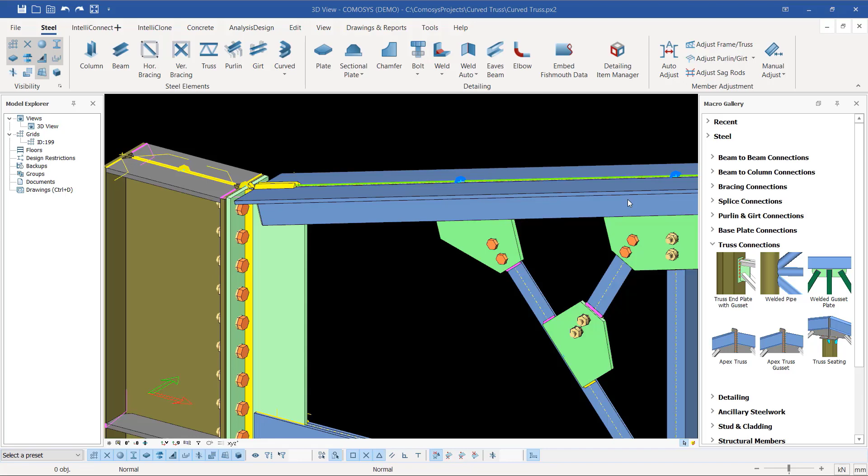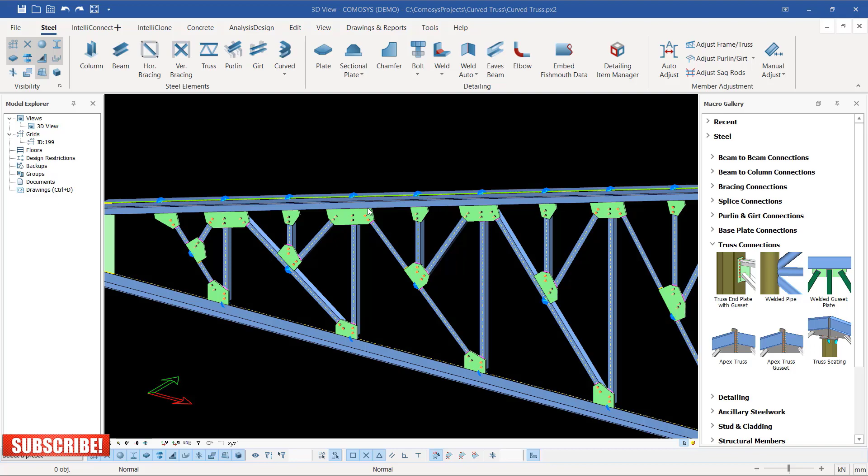Let me show you how we can do that, because this is a manually created truss, not created by macro. You have to assemble all the parts so it comes together. You organize your assembly how you want it fabricated in the workshop, lifted, or shipped to site for assembly and erection.

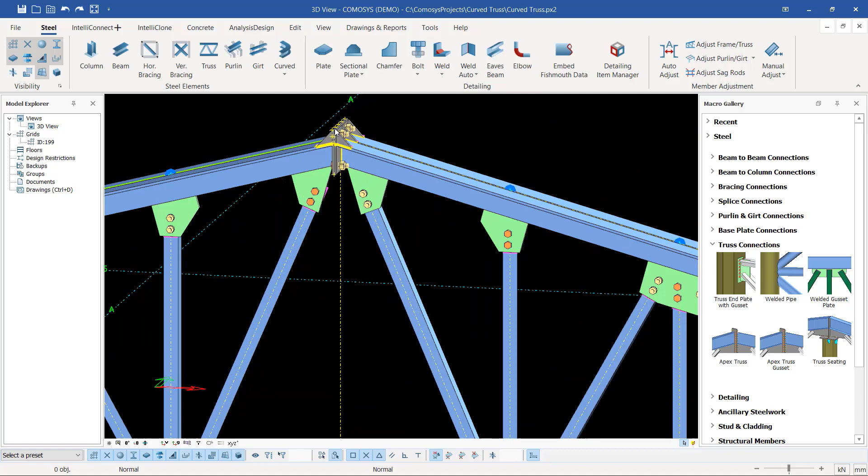So we have this truss split into two. One section will be carried to site, and this section will be carried to site. It will be lifted by crane and bolted. One side bolted on this, while holding this in position, we'll bring this and assemble it right at the center, at the apex here. Then bolt the splice at the bottom end here.

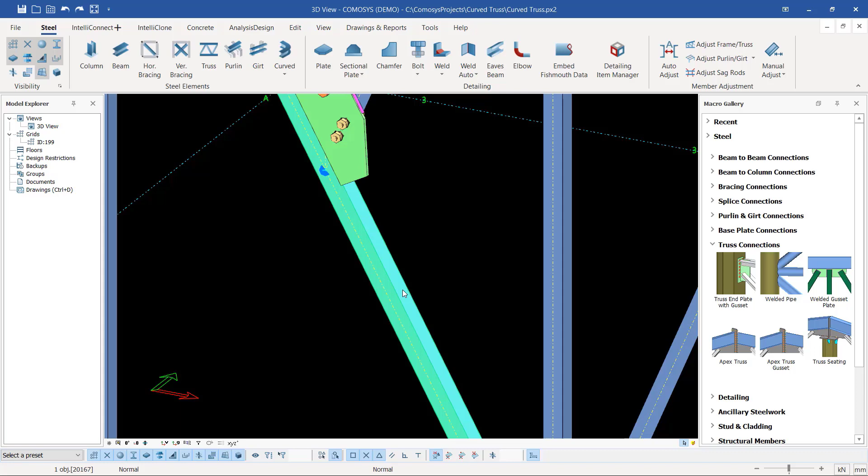Then do the rest. Now, as it is, our assembly is not fully assembled, so we want to put everything together as an assembly. If I mouse over here, select this member, the internal struts or members, right click and come to assembly, we'll find that these are already assembled because of this particular welding you can see here. So COMOSYS will read it as one assembly.

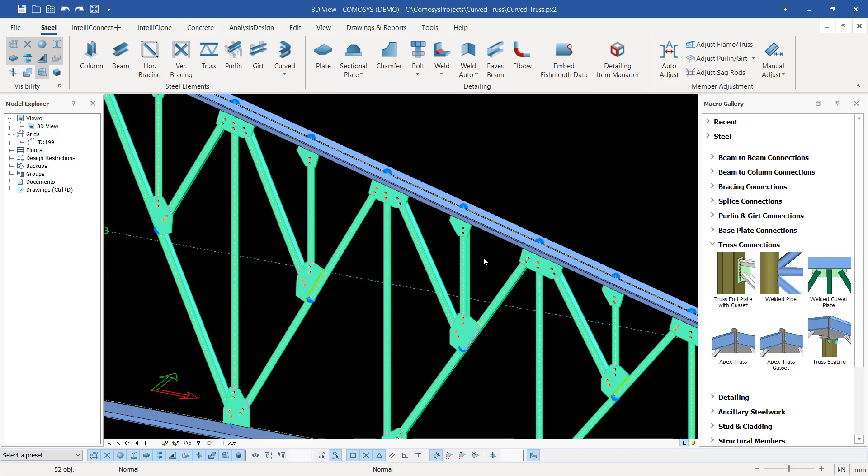If we go the same way here, click any member, right click and come to assembly, we'll see everything has been assembled. If I click assembly, you see the top and bottom chord have been left out. There's no way you'll be able to carry this as an assembly leaving both top and bottom chord. So we have to carry top and bottom chord as an assembly like this one, then do the erection on site.

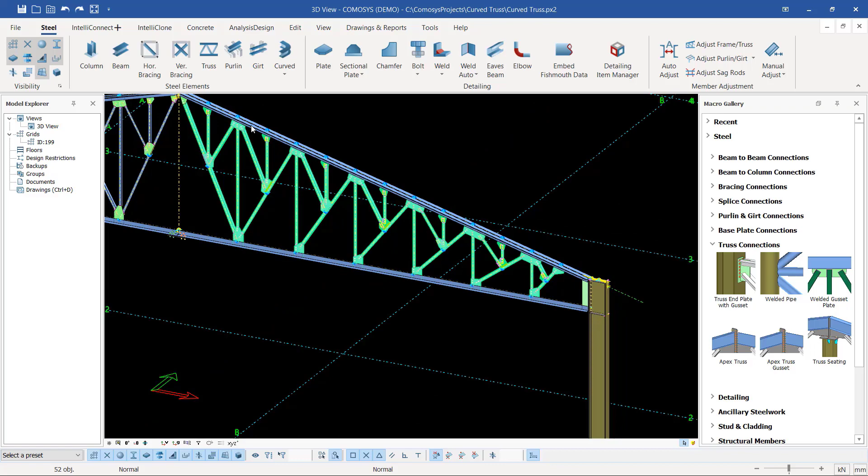Now let's add the top chord and bottom chord to the internal members as an assembly. We'll come to weld here, select weld, then select the edge of that particular top chord, then select any member here and add to that. We'll do the same, and prior to that, let's check whether everything has been added, or if it's fully assembled.

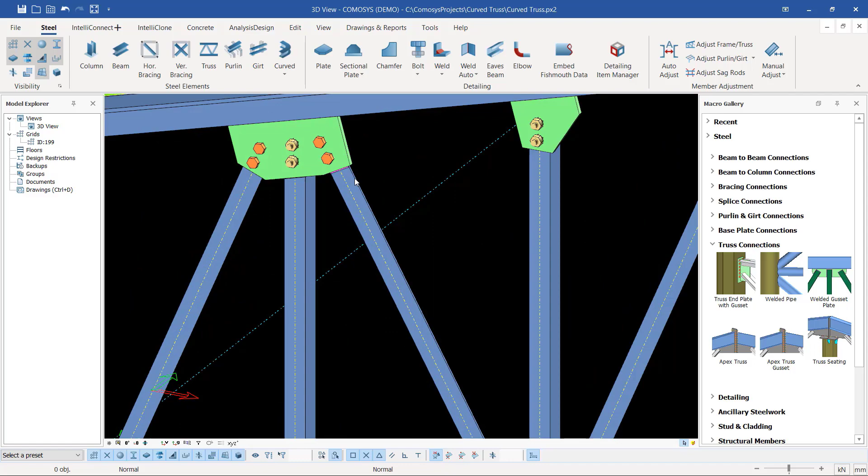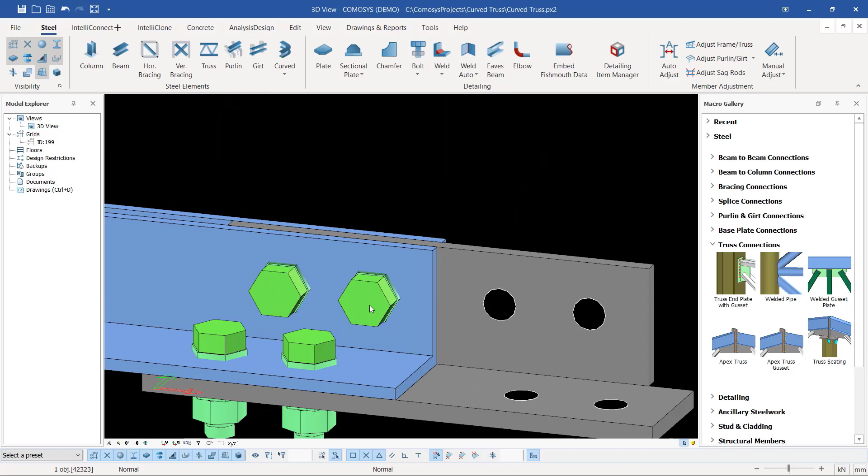Once welded or fabricated in the workshop, this will be carried on a truck that can accommodate the full length of this particular truss. You can see this will be carried, though these plates will be unbolted and will be bolted on site during erection.

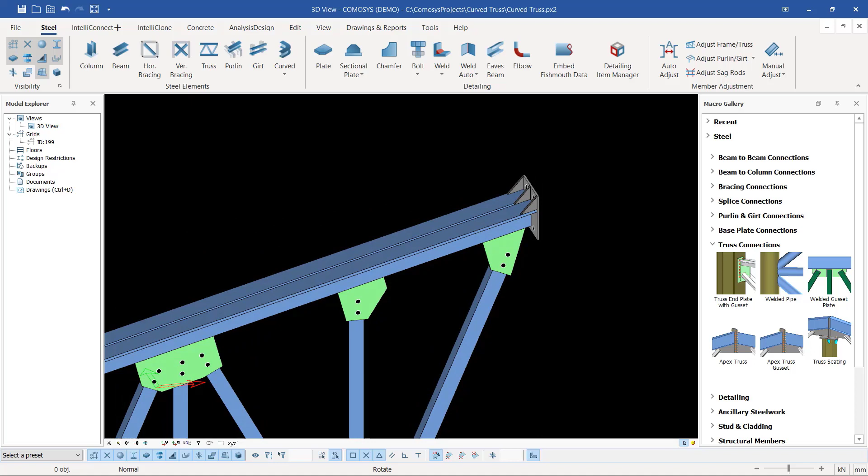So you can see that at the apex here we have that flange already done neatly, and we have that in place. The assembly has left out the bolts, or they've been just converted to holes instead of bolts. So you can see this is a full assembly, and you can just go ahead and create a drawing for this. Let me right click and come to show all.

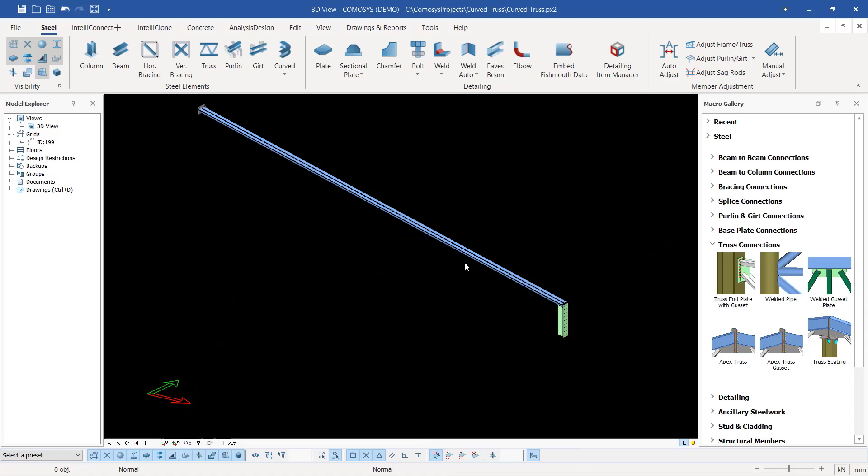If we come to the other section of this truss, you can see if I select this member, right click and select assembly, only this member has been selected as an assembly. I'll right click and come to special copy, then select or show only selected, and we'll see only this one. This is not the best assembly. You cannot take this to site as an assembly. So let's add that to our assembly.

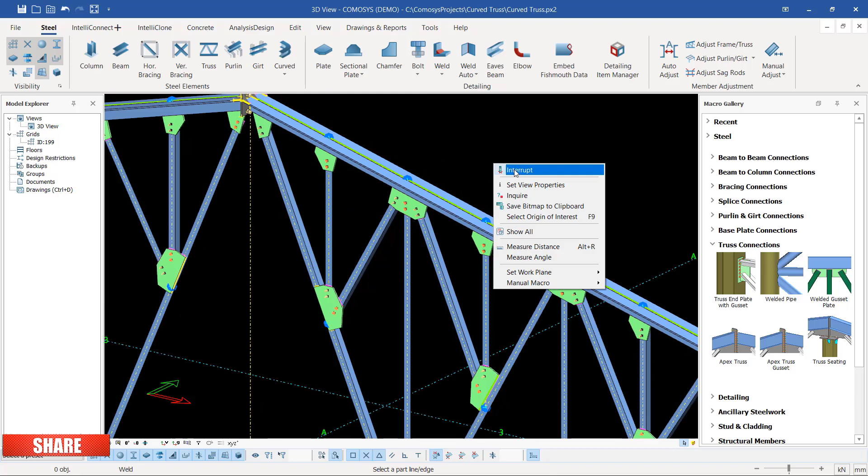I'll come to weld here and select weld, then snap at the edge right there and add it to our internal assembly here. If I right click and pick any member of this, right click and come to assembly, we'll see this member added to the top chord and added to the bottom end as an assembly, but the bottom chord is not added.

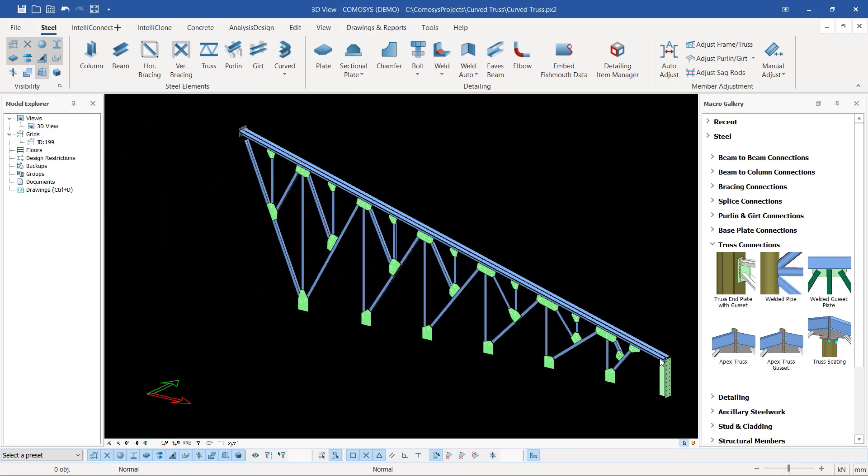Right click and come to show selected, so you can see only this has been added to assembly. So we want to add the bottom chord. I'll right click and come to show all, and come to weld again, pick on the weld, then add these to the assembly.

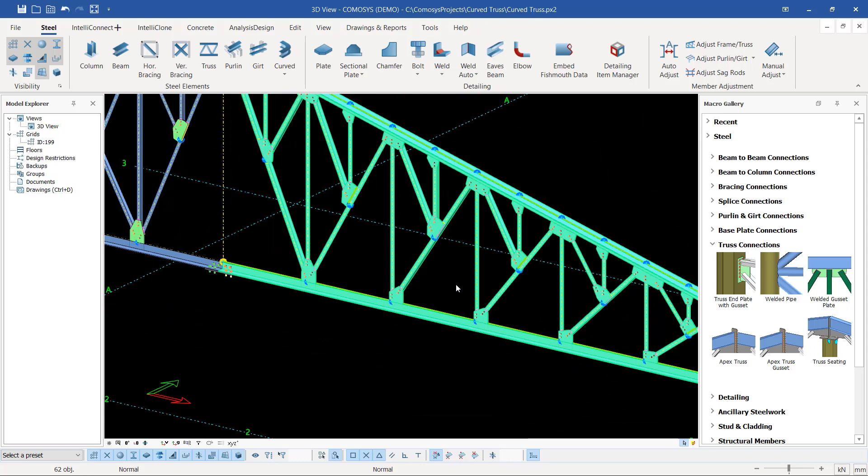Right click and try if this has been added. I'll come here and click assembly, and if I right click once again and show selected, you'll be able to see this has been added to assembly, though we are leaving a gusset plate here. We could add that gusset plate, or just leave it as is, since the other side has also included it inside the assembly. It's always good practice to add it and make it look much better.

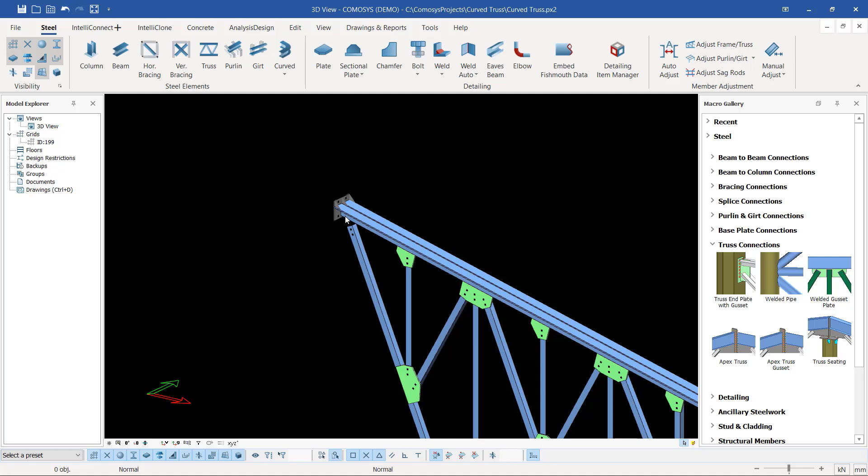Right click and show all. If I come here and weld this to that, the welding has been created. So let's try if our assembly is in place. It has been left out still.

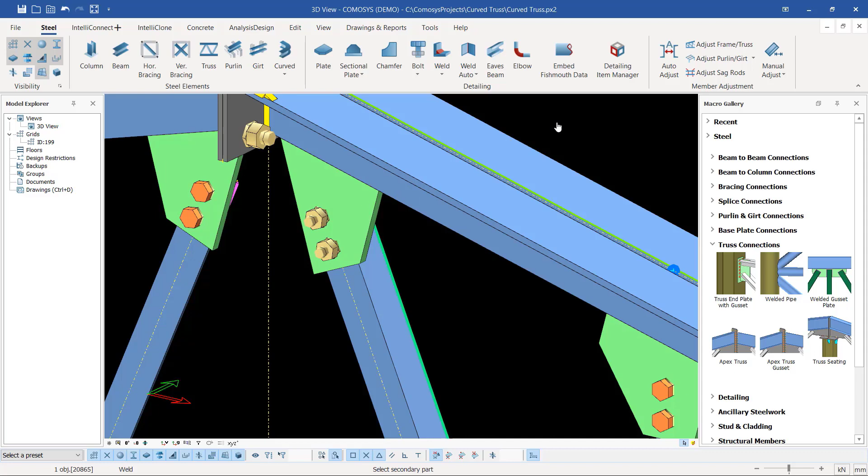So I'll come back to weld, and weld this member to this member. If I right click and try to check my assembly right there, I'll see it's still left out. So what next step do we need to take? What action do you need to take for this?

Let me first undo that so we remove the unnecessary weld. Let me select assembly, and everything has been included. So the part remaining is just this single gusset plate that hasn't been added. We want to add it.

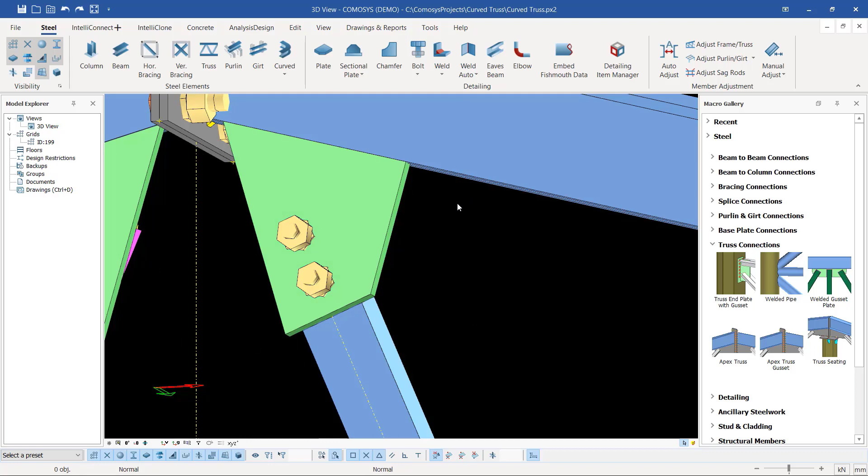To add it, let's try the automatic two-object welding. We select this member and add it to that member, then right click. If you select it, right click and come to assembly, you'll see it's still not adding up. So we try that.

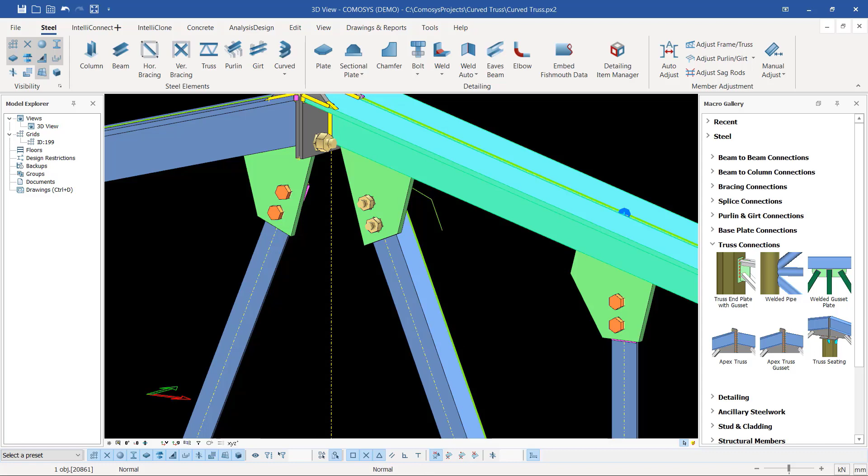We'll try this member here. First, turn it into position so I'll be able to add it well. Let me select on that member, select on this, and add that. Perfect. Now if I come here and show assembly, we'll have everything included.

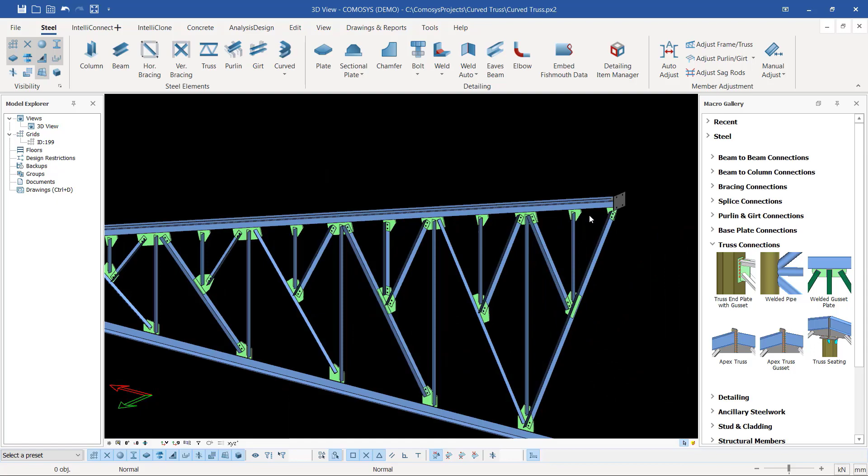If I click show selected, we'll see that has been included. This is how you can narrow down, add, or exclude assembly of your model. So if I right click and come to show all, I'll see that in place.

So let's add the base plate at the bottom end here. There's one thing I need to add - we need to add the eave. Under the eave here, you can see I have a point here. This point, we can just confirm the length.

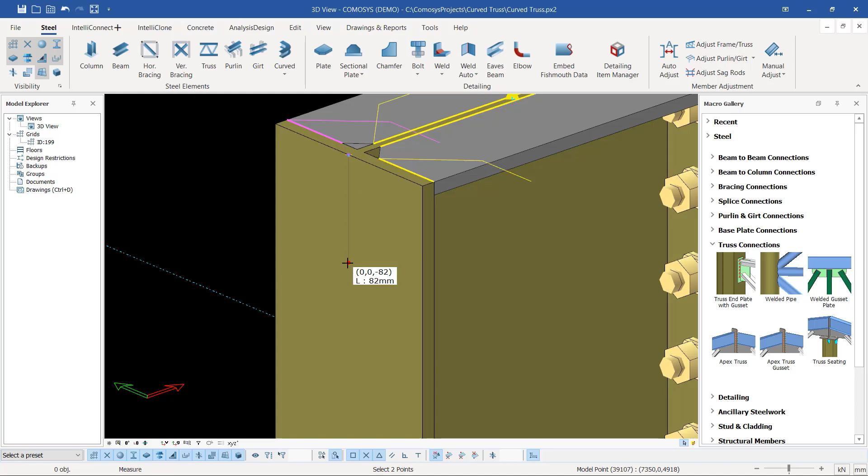If I come to check the distance, if I check on that distance, this is 82. I want to add this because it will be carrying the gutter, since the iron sheets will be sloping on that and draining water on the gutter here. Let me just define or create a member that will be suspending the gutter, where the gutter will be bolted.

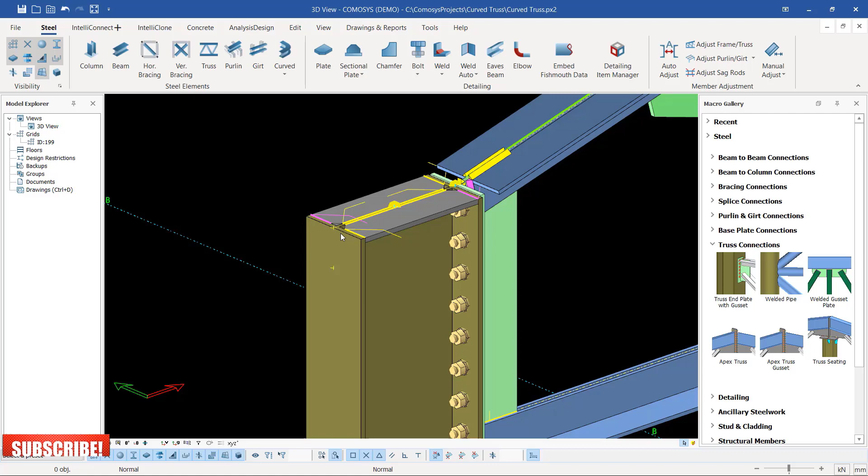I'll come to points here, come to edit to access the point, and snap on that point - though we have a point in place. So we'll just copy this point, right click and come to copy, click linear.

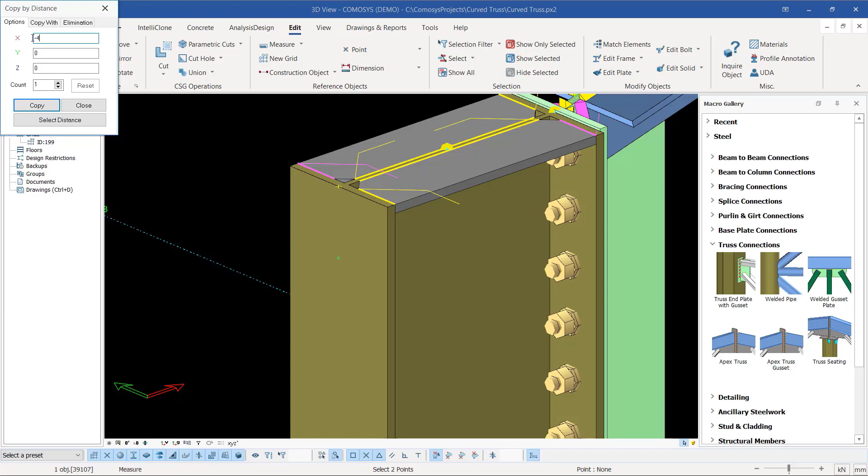Under linear, I'm going to offset this point by 400 in the direction of the x-axis, but with a negative prefix on the side of the x-axis. So I'll type in the negative sign, then type 400, and click copy - just one copy. If I zoom out, I'll be able to see this member, this point.

So I'll copy this point upward by 100 - 100 will be okay, I'll take it up by 100. I'll have to change everything to 0 except on the side of the z-axis. Since we're going up, we're moving in the positive direction, so we don't need to prefix it with a negative sign, because as it is, it's already positive.

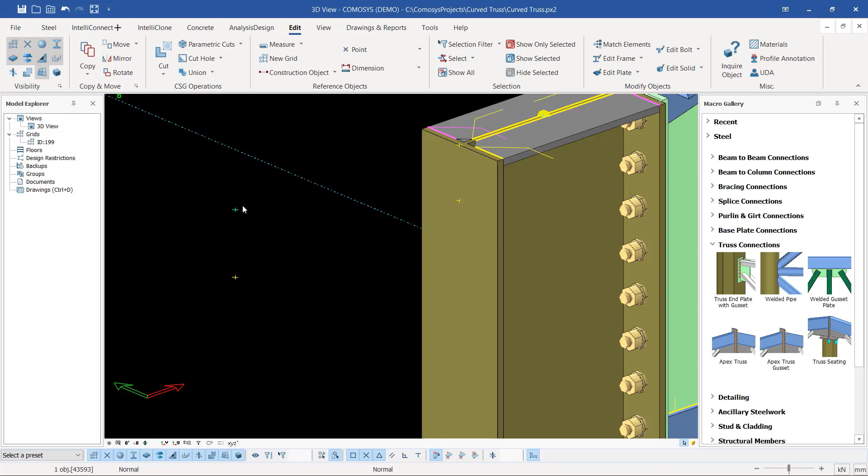So we click on that, click close - here, this is 100. We want to offset it on the x-axis once again. Select on that point and come to special copy, and we want to take it again on the x-axis direction by 50. 50 is okay, so we have to change the z-axis to 0.

So on the x-axis, we'll feed in here 50 millimeter and click. So we have to prefix this with the negative sign because we are moving in this direction, in the opposite direction of x. So if I click on that, we'll have our point in place.

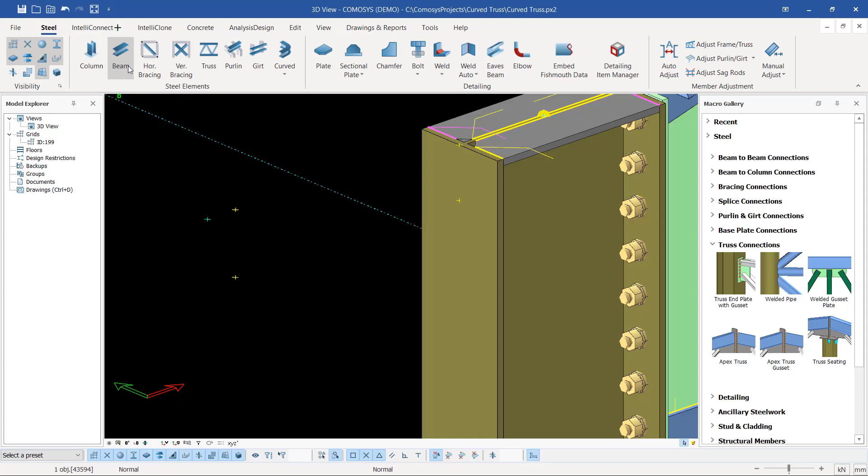So let me just place a member here. I'll pick on that member. I'll snap on that spot and move all the way to that spot. So we have our angle line in place, and we'll come here and place another member there. So let me just turn that around like that so that you see.

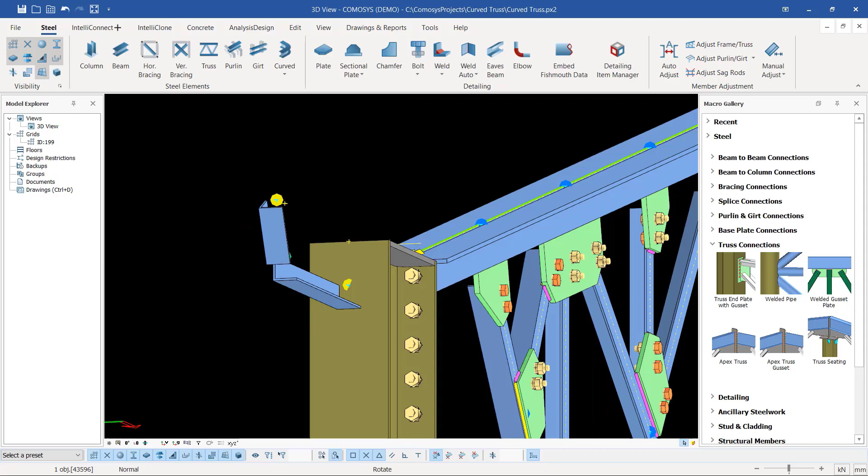So as it is, it's kind of tricky to place our gutter. There's no place it will be able to be bolted properly. So we have to rearrange the placement of this particular member. So select on that member, press Control Q so that we can turn that back to that far end. So select this one once again, select Q, and that will be able to connect with that.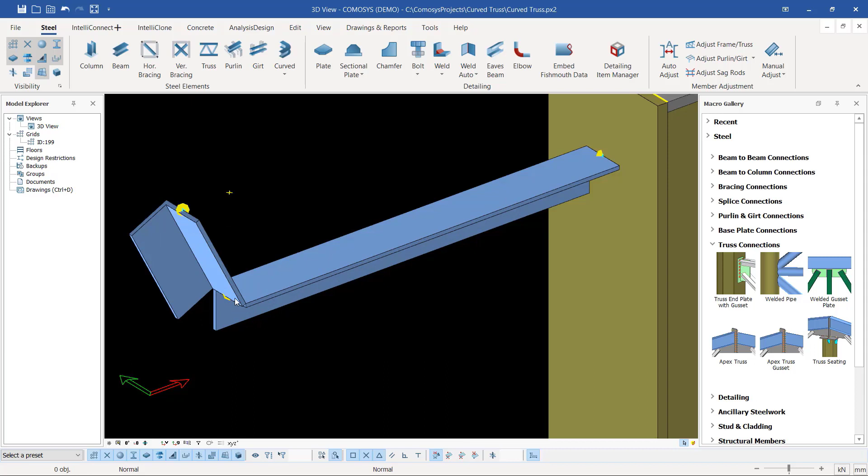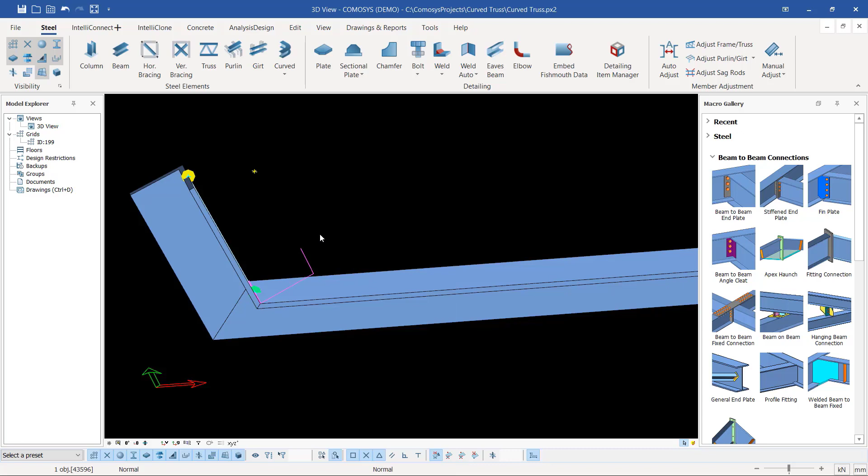So we have to fit these members because as it is now, there's no proper fitting here. So we'll have to fit this. So where to get the right tool for this? We'll come to beam to beam connection, and we pick on the fit connection. So if I pick on the fitting connection macro, select on that and select on this, I'll be able to create a connection right there, or I'll be able to fit the two members.

So let me rotate this and turn that, and I want to create an end plate connection between this member to that column. I'll minimize that and come to beam to column connection. So if I come there, I'll be able to pick on general end plate. So if I pick on general end plate, I'll be able to select this member and that member, right click to create a connection. There is no connection created.

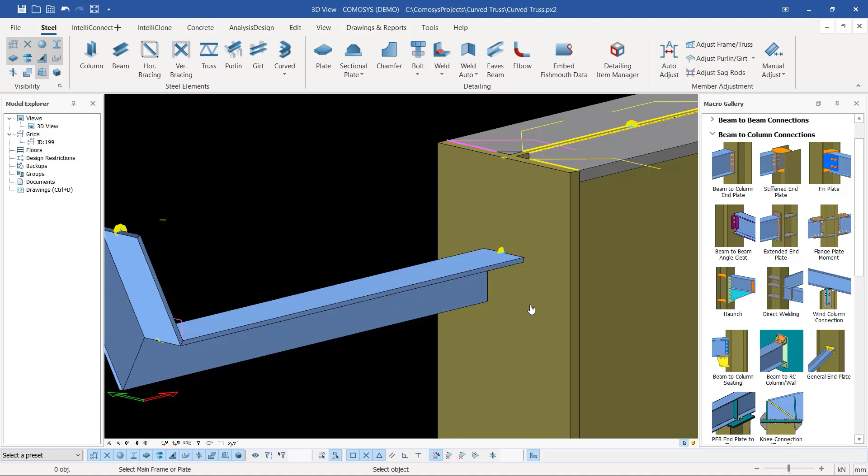So which tool can we apply? Let's first of all try that once again. Select main frame. This is the main frame, and this is the second member. So I'll right click, and I'll right click to come out of that command. So you can see we have this member in place.

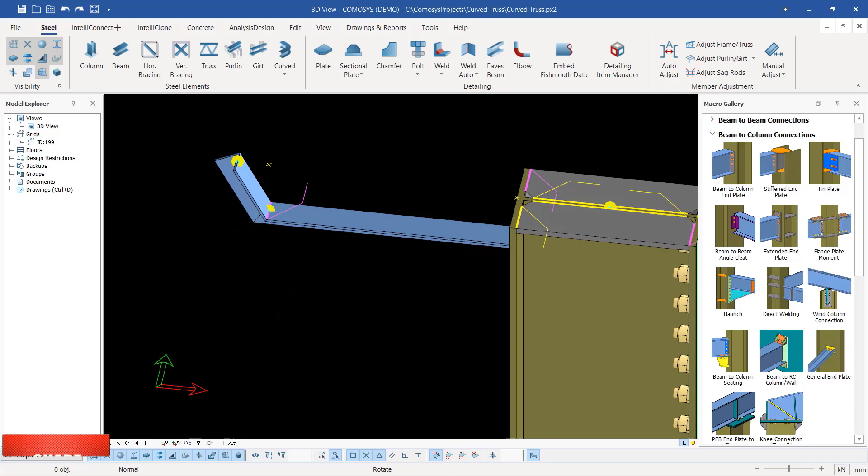And prior to that, we have first of all to identify the holes, identify the placement where we will locate the holes where the gutters will be bolted against this particular member. So we have to define the location of holes. So this will take us back to edit menu. Then we come to point. We select on dividing points.

So I'll use this existing point here and move all the way to this far point here to get the midpoint between these two. So in between these 2 points, I want to get the midpoint here. I'll come back to dividing points and snap on that spot and move all the way to that spot so that I get this midpoint. I'll come back here and snap on that spot to get that midpoint.

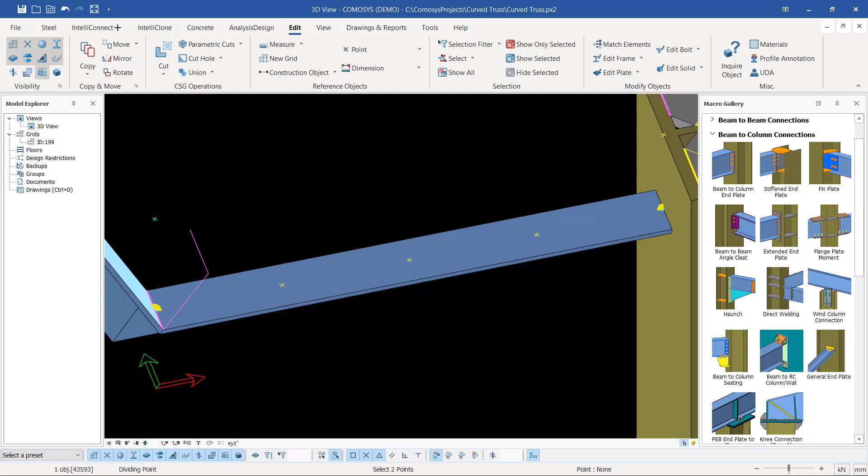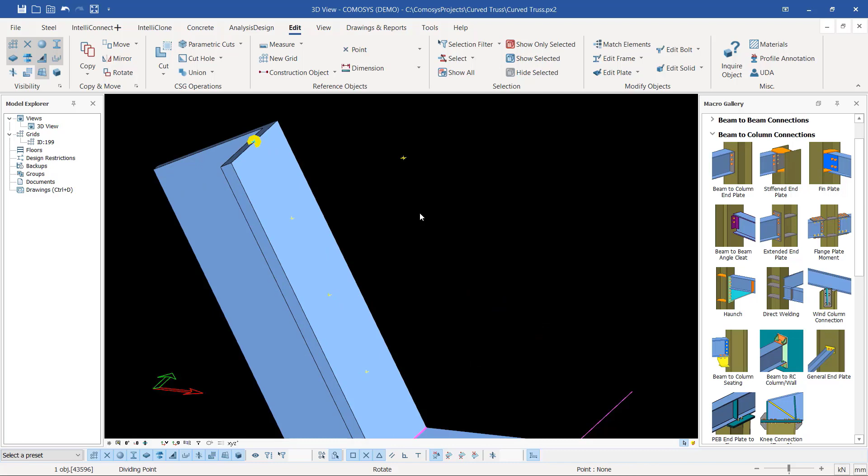I'll do the same thing here on the inclined member here. I'll come to dividing points and I'll snap on that spot and come all the way to that spot and snap. So let me create another point there and create another point here. Perfect. So you can see that. So once we have that in place, we can go ahead and create a connection here.

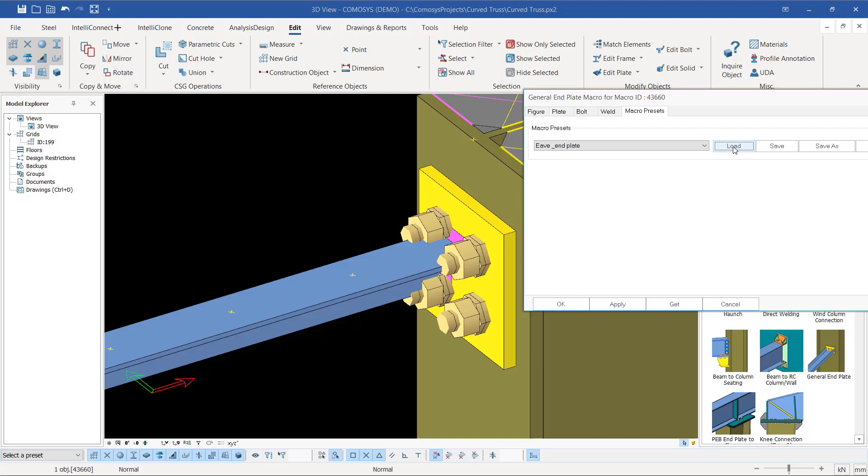So once we have a connection in place, just select any member, any part of that connection, double tap letter M on your keyboard and enter. So this will take us to our macro preset here where I'll just load in the type of connection I need to apply there. I'll click load to load my setting and click apply.

And if I come to OK here, select that point, your point of interest, and press your right button and hold and move your cursor like that. So we have that point, that part has been created. Now we want to create the holes here.

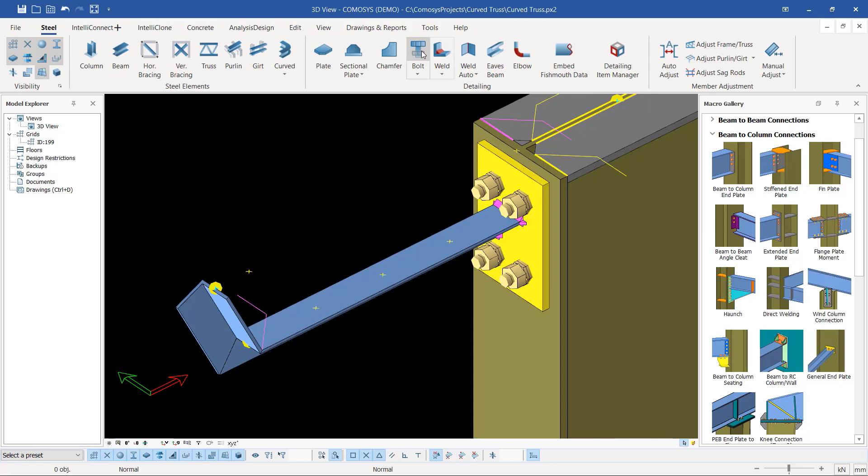I'll come to bolts under steel, then pick on the bolt. So I'll select the part I want to create the bolt on, then right click. Then I'll snap on that spot and snap on this spot here, on the points I had created. So you can see these bolts are way off the target or the defined points or the defined distances.

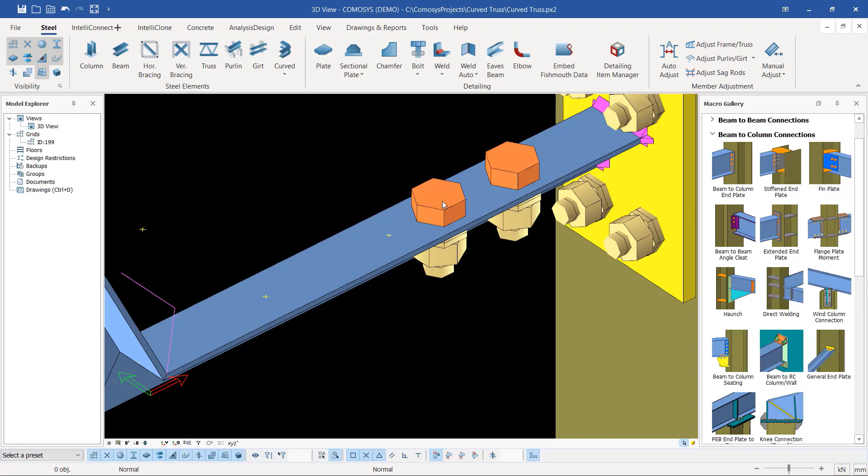So to check the bolt location, I'll select the bolt, right click and click hide selected. So I want to check this distance from here to here. What's the distance? I'll right click to interrupt, then right click once again, interrupt, then right click and come to measure. Then I'll snap on this spot and this spot. This is 100 and this is 200. So this is the 100 center to center of that bolt.

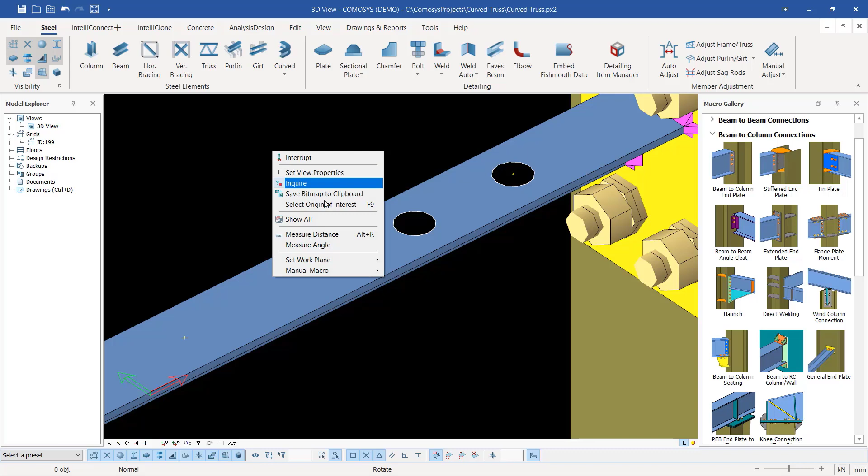Now I'll right click and come to show all, then double click on this bolt, then come to positions here. Under positions as it is now, from this center to this center is 60. And by default, we have 2 bolts in place. So we'll get rid of this 0. Now we want two bolts, 2 bolts at 100. So if you click OK, we'll have 2 bolts, but only 2 bolts here at 100 millimeter.

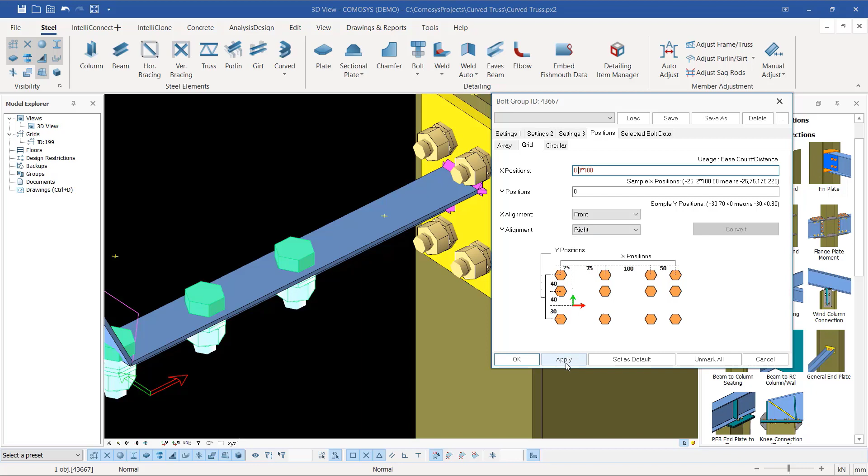So we go back and add another bolt here. Just add 1 to make it 3, and click OK. So we'll see another bolt added. So let's add 0 there and click apply. So we have a bolt here and we have an extra. So we have to get rid of another one there and click OK. So we have our 3 bolts in place.

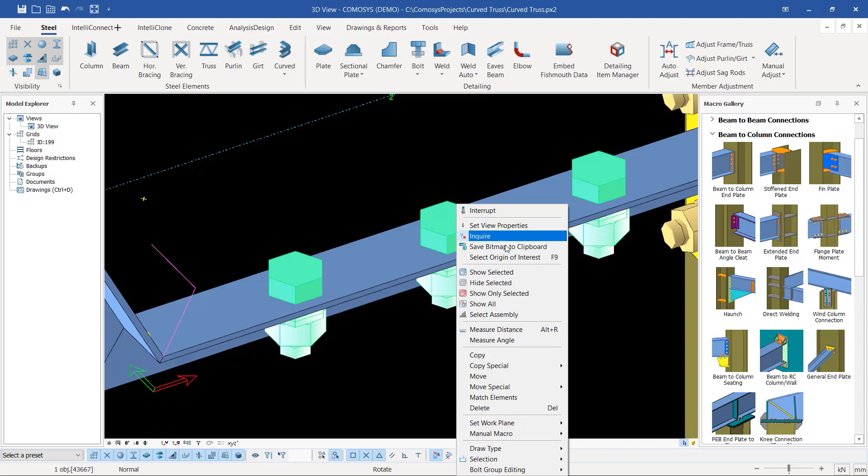So I'll turn that round. And to confirm whether it's 100 center to center, just hide this bolt first and check that. You can see it's exactly on the required location. Then right click and come to show all. Then we want to add another bolt here and another bolt here.

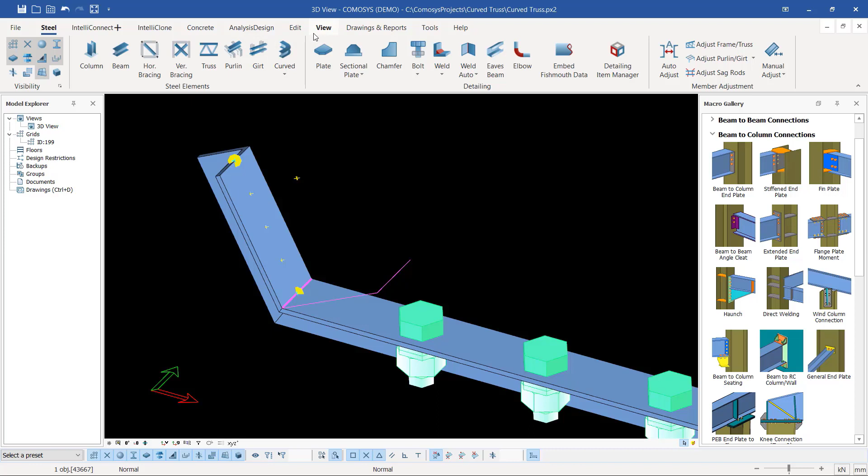And the way this member has been placed, it is on an inclined plane. So we have to orientate our work plane or axis to take the slope of that particular member. Let's first of all try it and see what's going to happen. I'll come to bolt, select this member, right click and snap on that spot and this spot, and you'll see the bolt is following the XYZ plane as it is here. It is on the global position. So I'll click on that and delete.

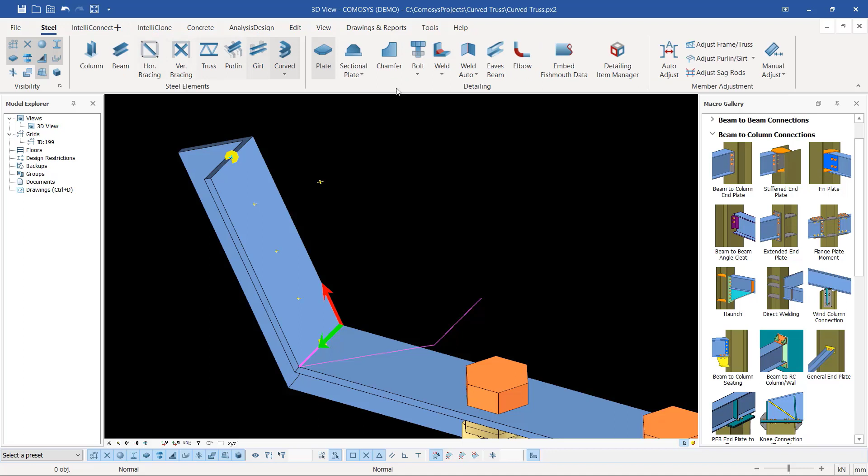So I want to take this axis and orientate it into the slope like this member. So I'll come to view, click on this drop down arrow and select to surface. I'll select the surface of that member. You can see our plane has taken the slope of this particular member. So I'll come to steel, pick the bolt, select the member I want to place a bolt on, right click and snap to that spot and this spot. So we have the bolts in place.

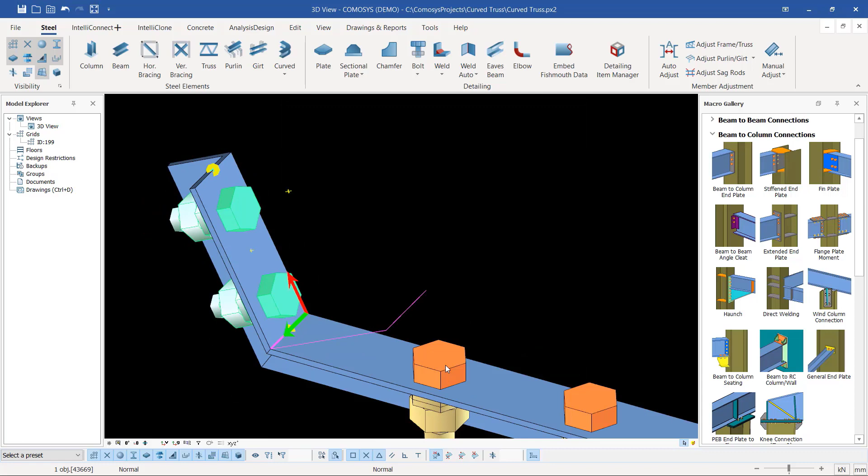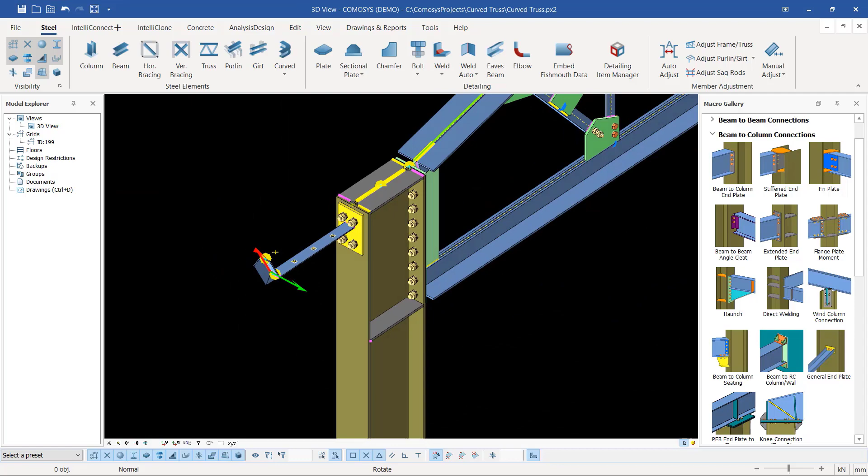If I double click on that bolt, I can change this to 16 millimeter or M16 and click OK. Then also double click here and change this to M16 and click apply. We want to show only holes, not bolt type. So just select hole, click OK, then double click on that and pick hole because we only want to see holes there. So this is how it looks.

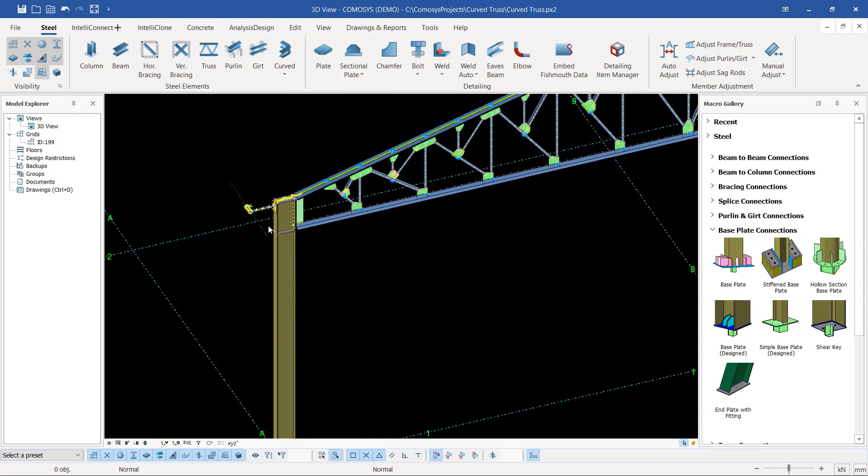And now we want to place the base plate. Let me just minimize this and come to base plate, pick the base plate, select the column, and we have a base plate in place. Now I want to copy this on the other end. I'll select this member, press Ctrl and select everything here. Right click and come to special copy.

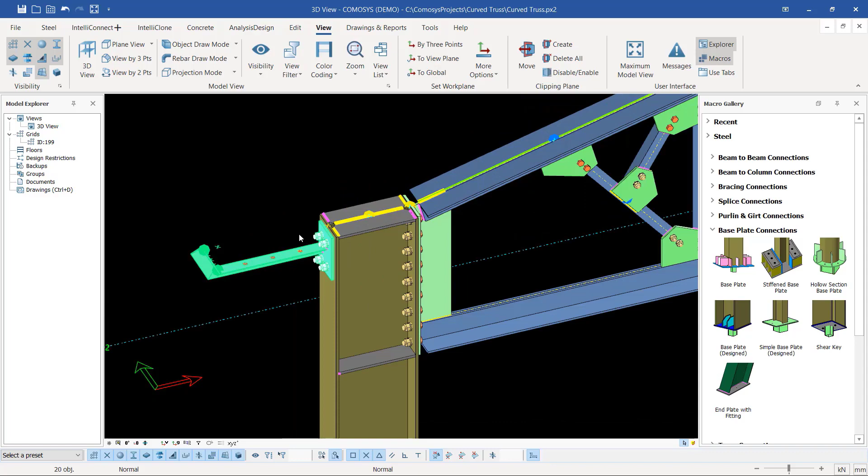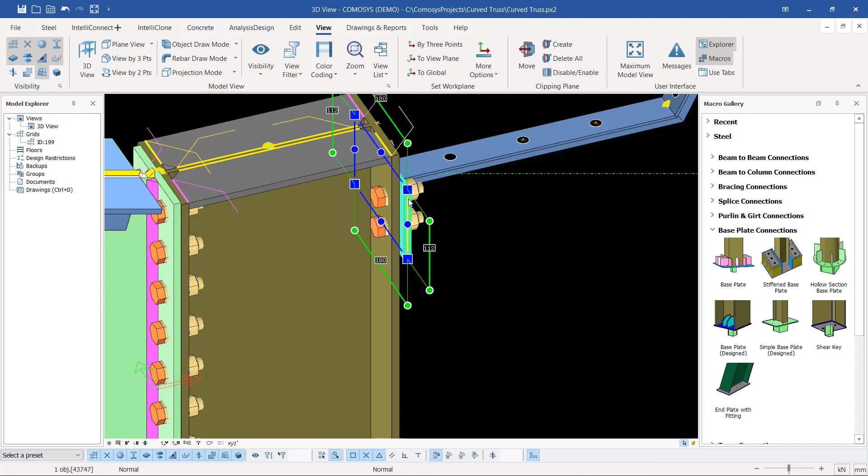And since our XYZ plane is not in the global position, I'll come to view and take it to global position. Then, having selected all these members, I want to mirror them in the opposite direction. So I'll right click, come to special copy and pick mirror. Under mirror, our mirror line is in the right location, so I'll come to options and click apply. Then I'll click close and come to this far end to check whether we have this in place.

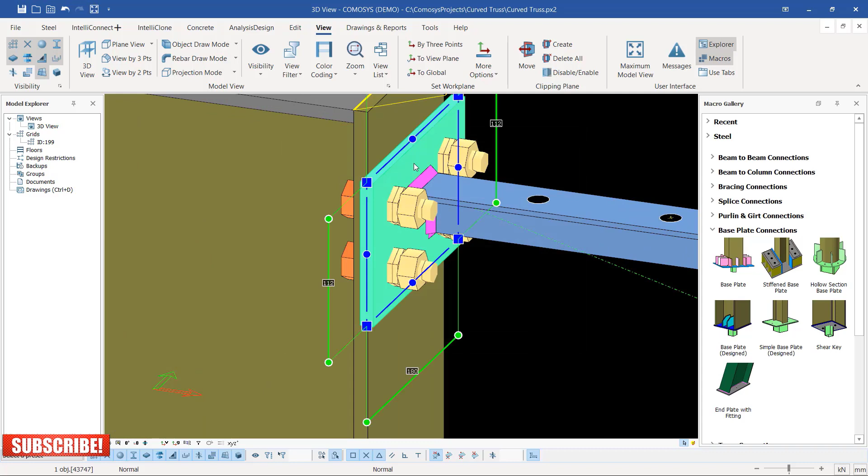Not the best position, so what we are going to do, we are going to recheck that and make it better. So I'm going to double click on this. I'm going to select any part of that member, double tap letter M and enter. Then I'll come to presets here and click end plate, IF end plate connection, then load, then click apply.

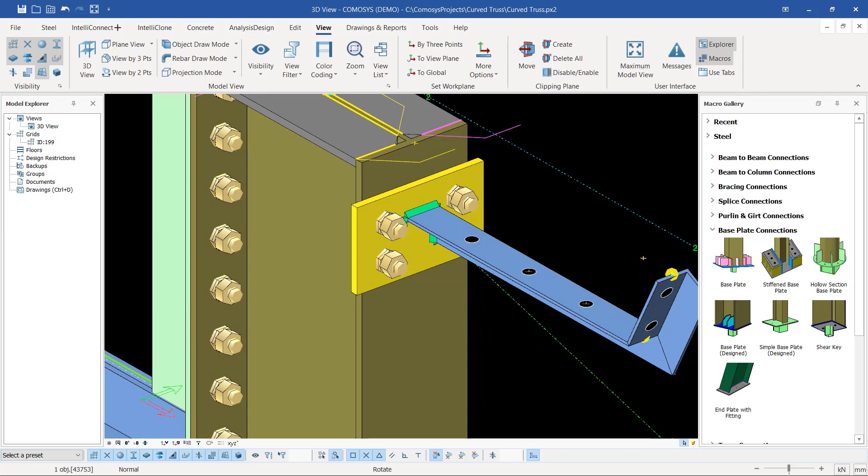Still not responding, and what I'm going to do now, I'm going to just select this member and delete, because I don't want to jump back and forth. I want to go straight and create it. Let me just undo that, undo that, undo that. So let me delete that. So I'll come back here on the beam to column. Then I want to invoke that command, select that member and select this member. So we have that in place.

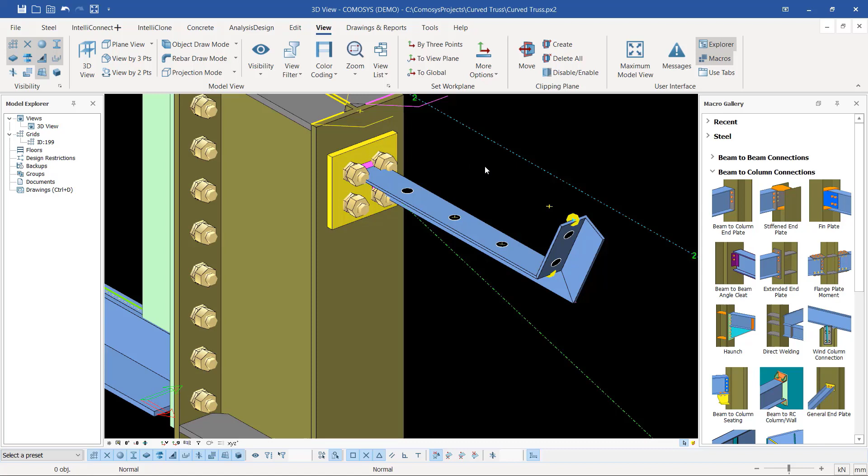So I'll select that member, double tap on letter M and enter. Then I'll come to my preset here, pick on IF end plate and click load and click apply. It's still not taking the best orientation. So what I'm going to do, I'm going to rotate this. I'm going to change these measurements.

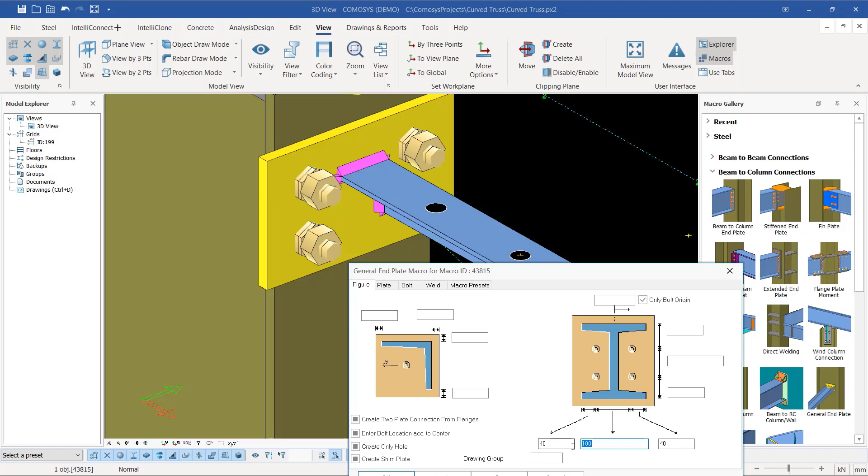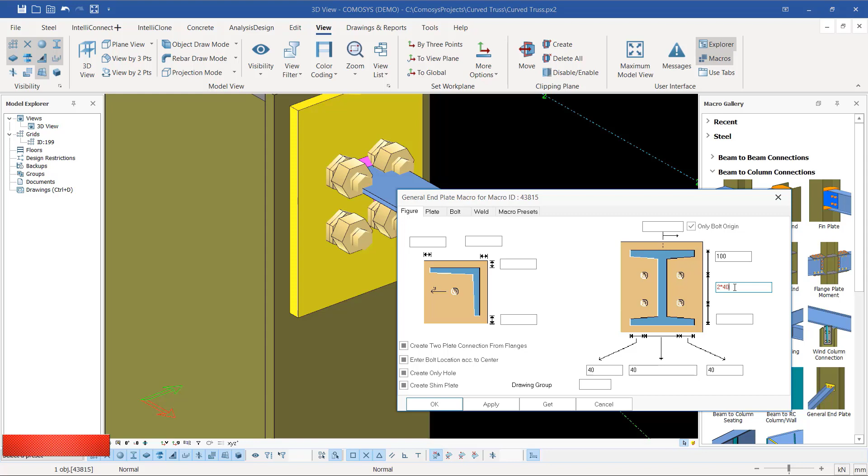I'm going to change this to 40. Let me just turn that. Apply. Change that to 100. Change this to 2 by 40. Apply that. Let me just undo that and undo that. So I'll undo this and then change.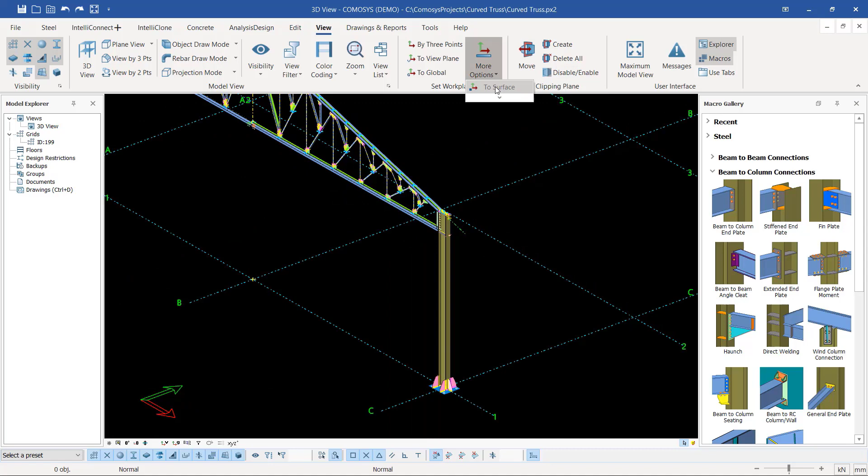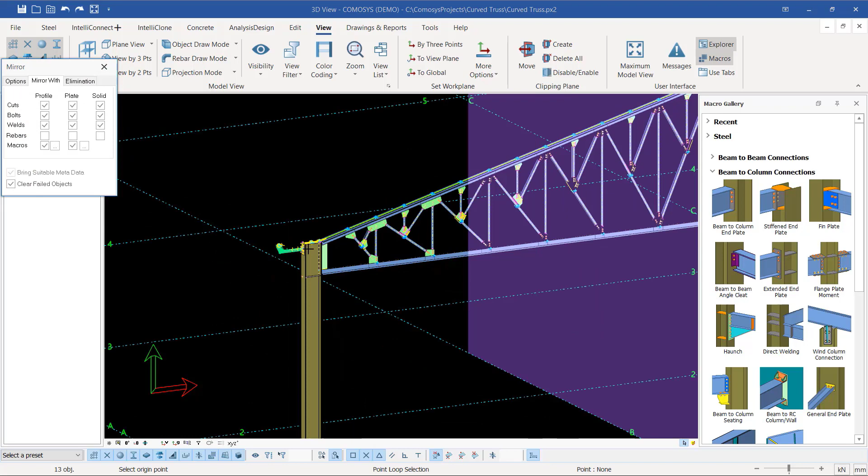Let me just change my XYZ plane. I'll come to more options here and select on that member. Then let me just place my XYZ plane on that spot. Then come here and select everything here. Press Control and rotate that. Then right click and come to Spatial Copy. Click on Mirror. Then click Run. So if I come here and check, it's still not responding. I'll turn that. I'll close my mirror there.

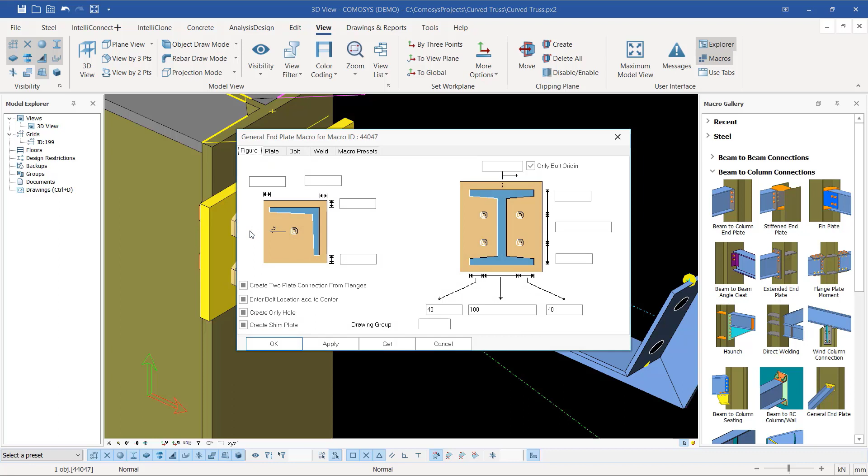So the next thing I'm going to do, I'm going to select this member, then double tap letter M to see how we can work our way on this. So in here we have 100. We change that, remove that. We click apply. Remove that. Take that to 40. Take that to 100. Take this to 100, which is wrong. Change that. We need two bolts there. Just a bolt right there. By 85 or 40.

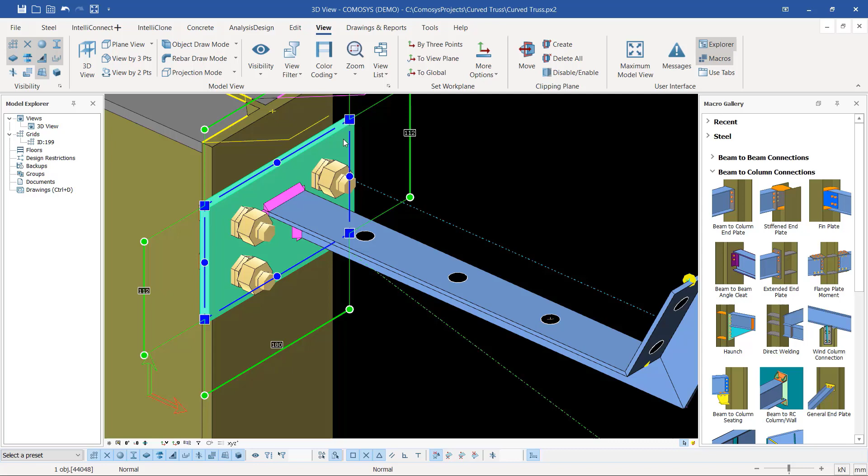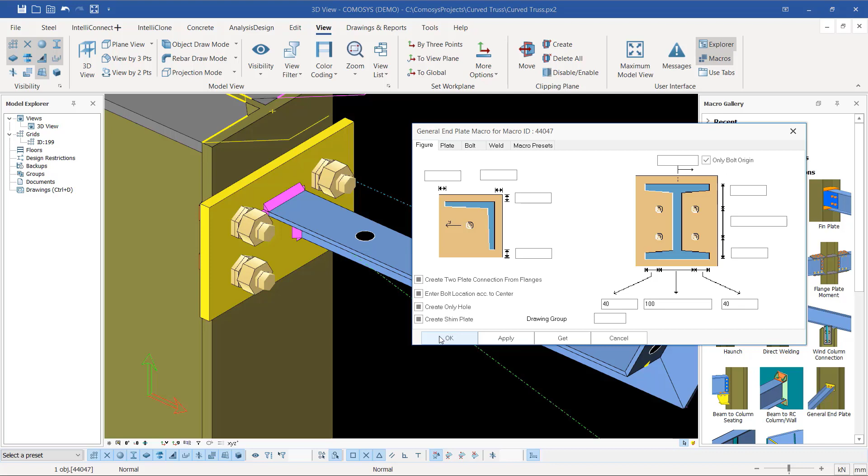Let me just apply my default settings here, load and apply. Let me select on that, double tap letter M so that we come here. Plate, weld. Okay, due to time, let me just show you how you can work your way out of that. Let me just click OK.

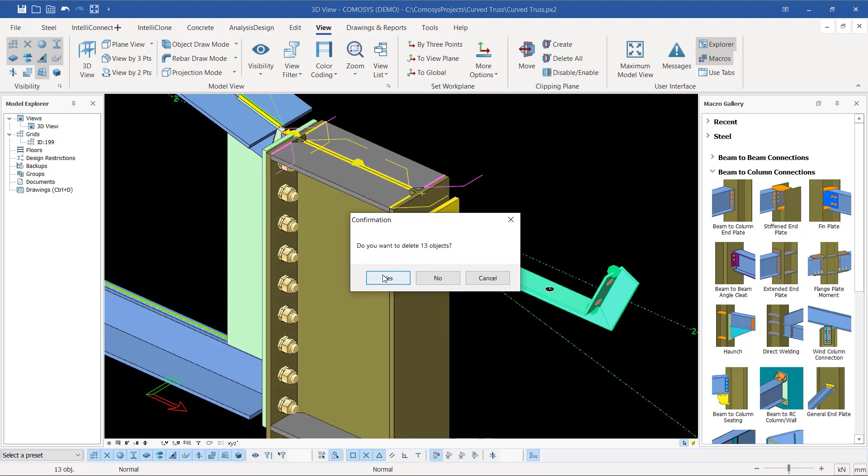So assume this is correct now, and first of all, before we populate this along the axis, let me just take that to global plane. Let me first of all delete this one because it's not responding well. Now let me close that. So if I select everything here, then I'll come to the spatial copy and pick on linear. I'll change that to 0.

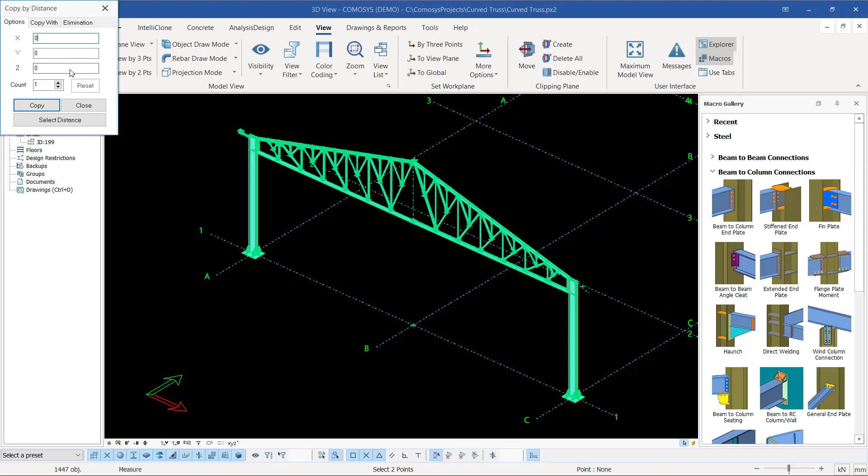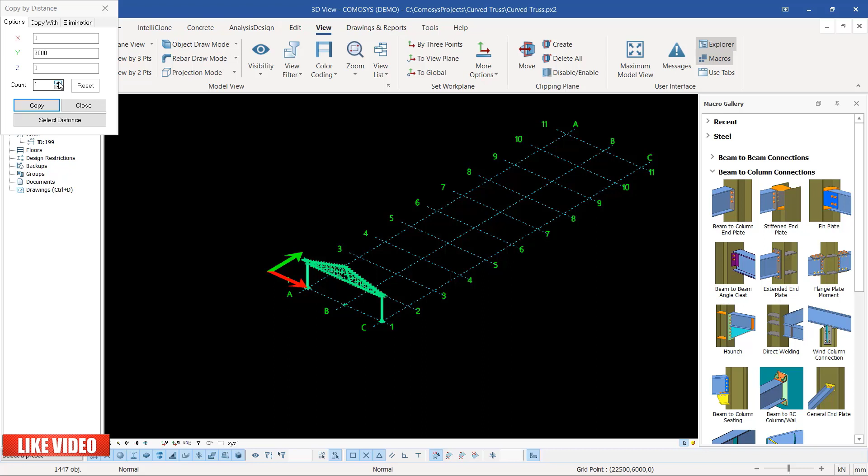Then on the y-axis, I want to populate this along the y-axis. So I'll mouse over here until I see a red snap there. Then I'll snap on that spot. The moment I snap on that spot, I need 10 of this since I have one in place. So I'll just click here up to 10. Then click copy. Give some time to copy everything. You can see on the screen here. Give it some time and everything will be copied.

You can see copying bay 2 has been done, 3 has been done, bay 4 is next. Bay 4 is done, bay 5 is coming, and bay 5 is done until we reach bay 10. Let's give some time to complete that process. We're on bay 7, you can see that. Bay 8 and bay 9 is coming. And bay 10 next, and everything will be completed. Bay 10 is done. Let it just summarize everything.

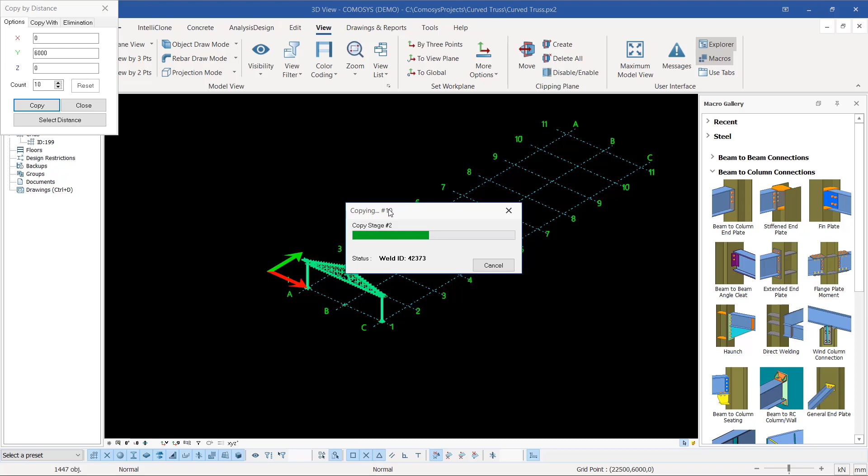That's all about that. Let's close that and close that, and you can see we have our truss already populated along the axis. You can see that. Perfect.

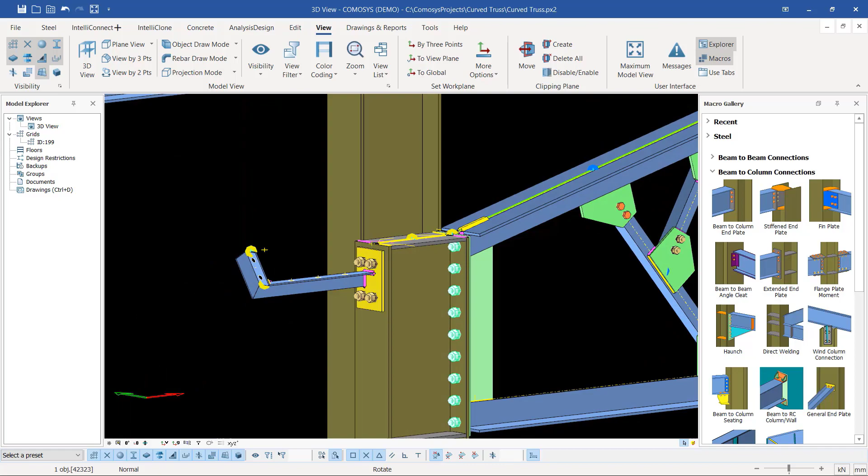So let's meet then on the next presentation. I'll try to show you how we can modify or play around with the detailing of this particular truss. Let's meet then.